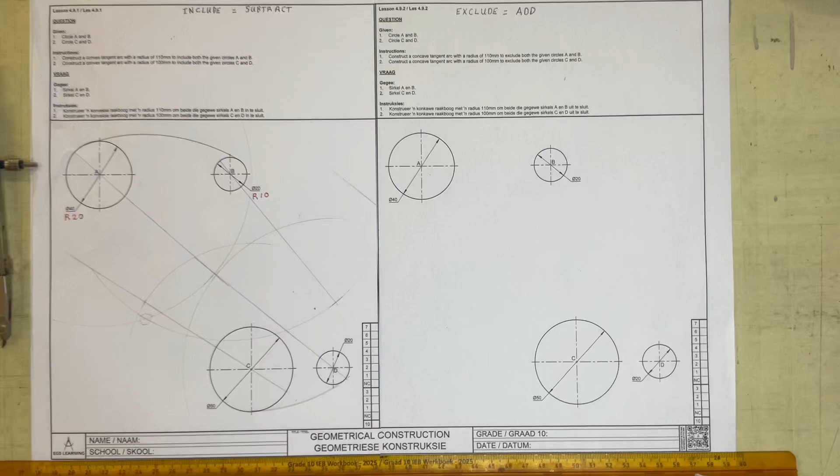All right, the second one, they're basically asking us to make an excluding circle. So we're going to have an arc which is going to look as though I'm giving it a backhand against there and a backhand against there. It says you're going to construct a concave tangent with a radius of 110 millimeters to exclude both of these circles, A and B.

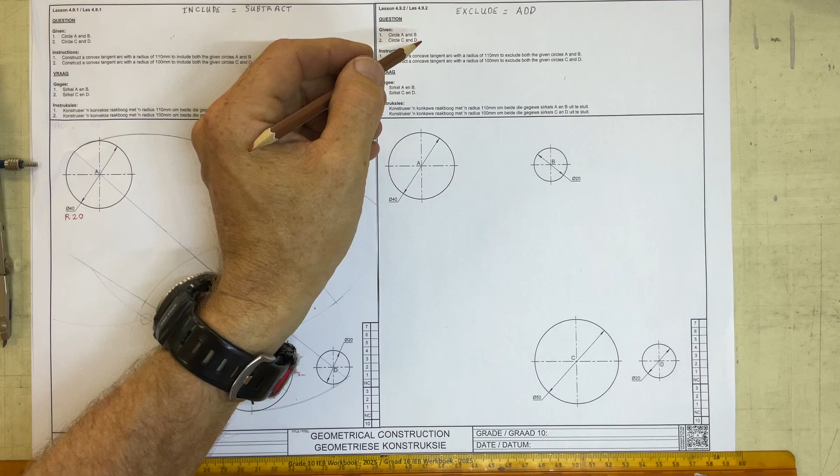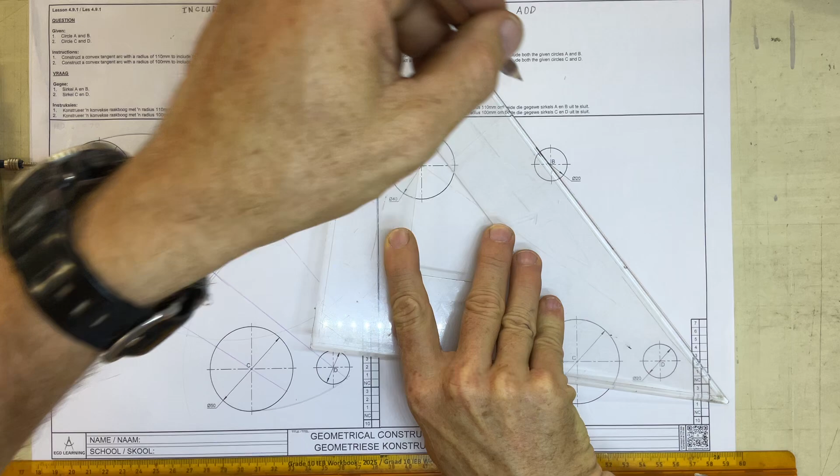So when we're excluding, we are going to add the two radii together. To do that, I'm going to start out and draw a little construction line coming out from A over there, and a construction line coming out from B over there. Hopefully I've made that long enough, because 110 is quite a long distance, so make sure you've drawn long enough construction lines.

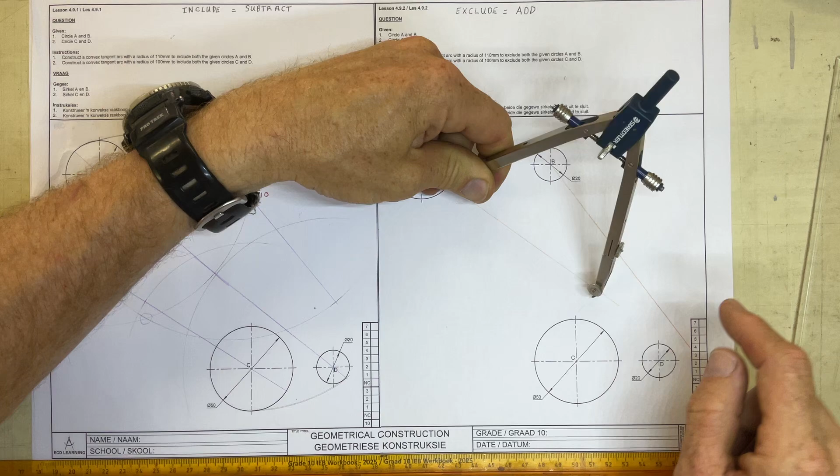I'm going to set my pair of compasses to 110 millimeters. There we go, 110 millimeters. If I just drew it from the center, that would be 110. But since I'm going to add on a radius, I'm going to add that radius to my 110. Make a little mark over there. So I've got the small radius over here, plus the big radius over there - small radius plus the 110.

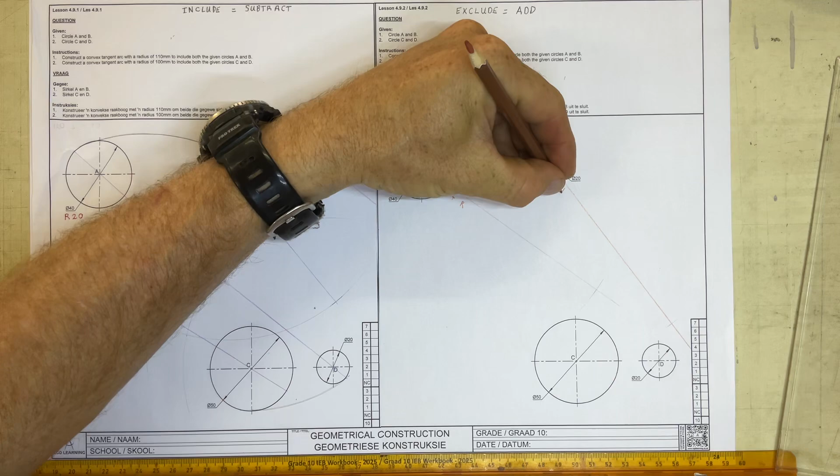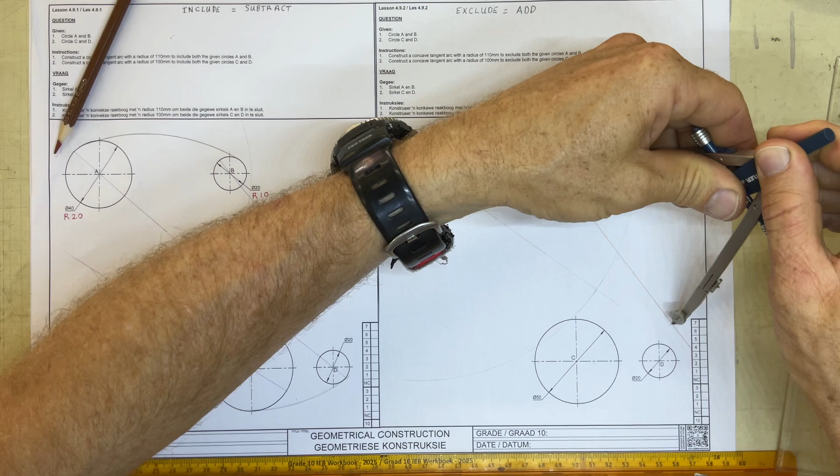Same story over here. There's the small radius going to the circumference. Mark that off, so I've got a small radius plus the big radius over there, and I've made that mark out there. Once I've done that, I'm going to take my pair of compasses, set them to that radius over there, and draw a nice long arc coming around like that. Then I come to B over here, wind it back to that radius, and draw a nice long arc coming around there.

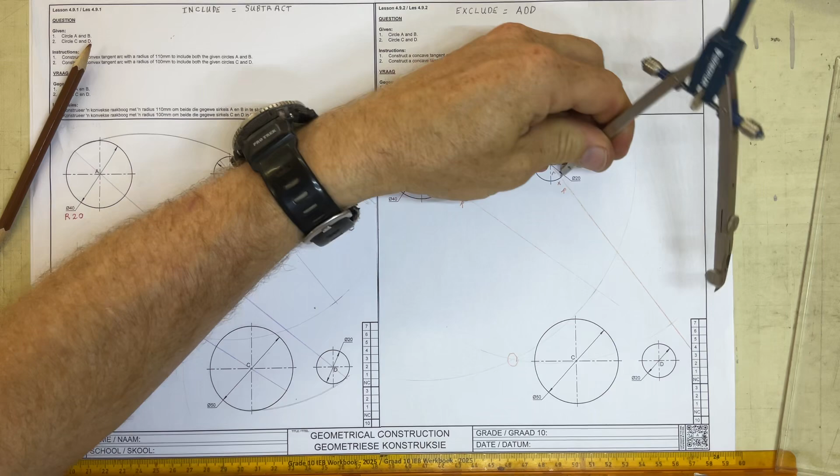I've got an intersection point over here, and now I'm going to set my pair of compasses to that 110. Note there's the 110 there. Check that, that's still the 110 there. If I put my pair of compasses in at that point over there, my 110 radius is going to draw an arc which excludes both of those circles over there.

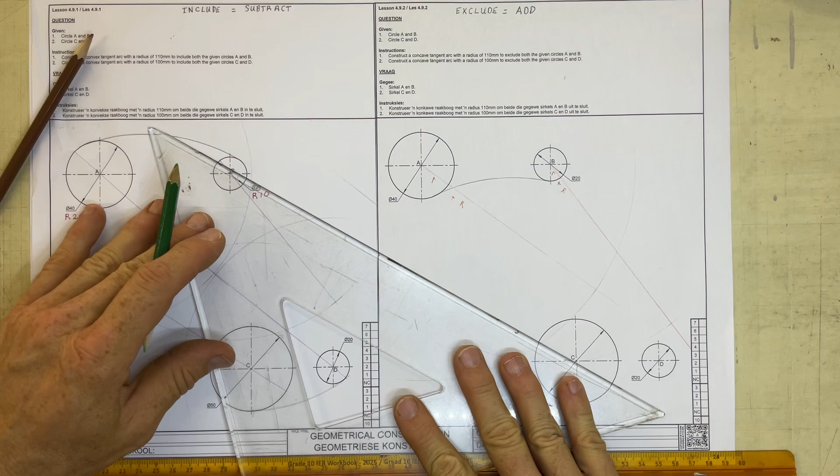Same story with this one. Let's just change the color over here so you don't get confused with any lines. I'm going to draw a line coming out from C, nice long line there, and a line coming out from D over there. And it says they're wanting a 100 millimeter radius.

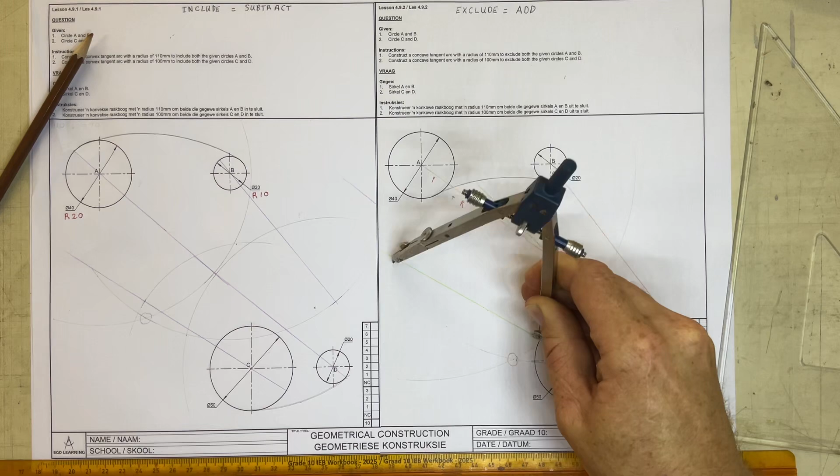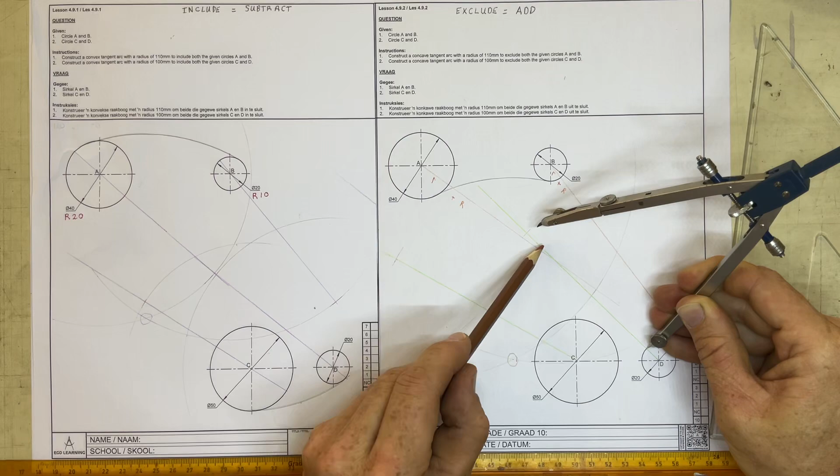I'm going to set my pair of compasses to 100. Go to C over there, move out to the circumference, mark it off over there. So I've got a 100 millimeter radius going out 100 millimeters from the circumference to that point, plus the radius. I'm going to do the same thing over here - there's my 100 millimeter radius on my pair of compasses. Move out to the circumference over there, mark off. So I've got small radius plus 100, small radius plus 100.

I now come into where C is. I extend my pair of compasses out to that radius over there, draw an arc coming round. Go to D over here, move them back to that point over there, and draw an arc coming around.

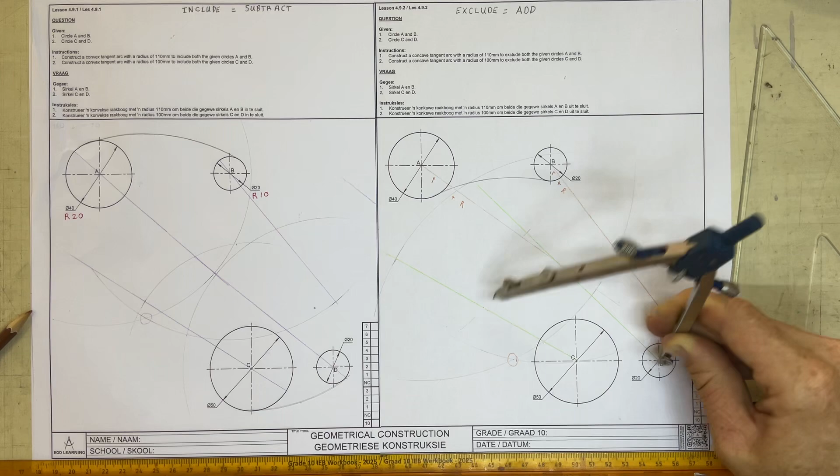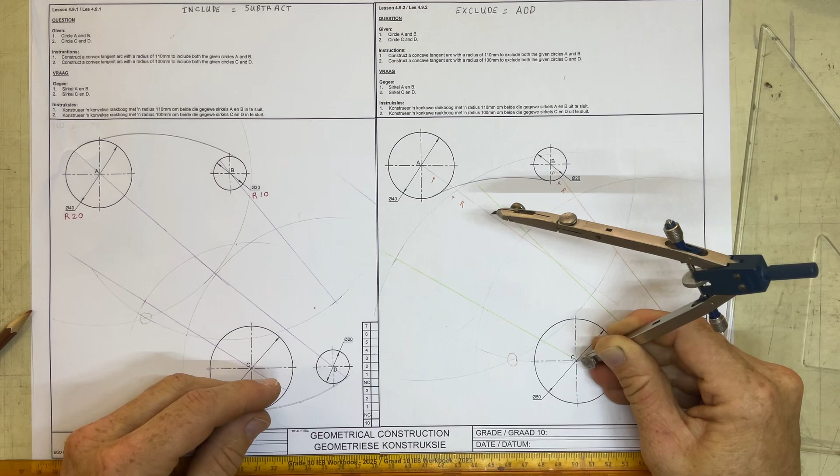Sorry, let's just see what I'm doing over here. That's not really working, is it? There it is. So I need to draw that out, and I need to take this, set that out there, arc that around, and there we go. There's my intersecting point. So don't be shy with these arcs that you're drawing - draw them all the way around, and there's my intersecting arc over there.

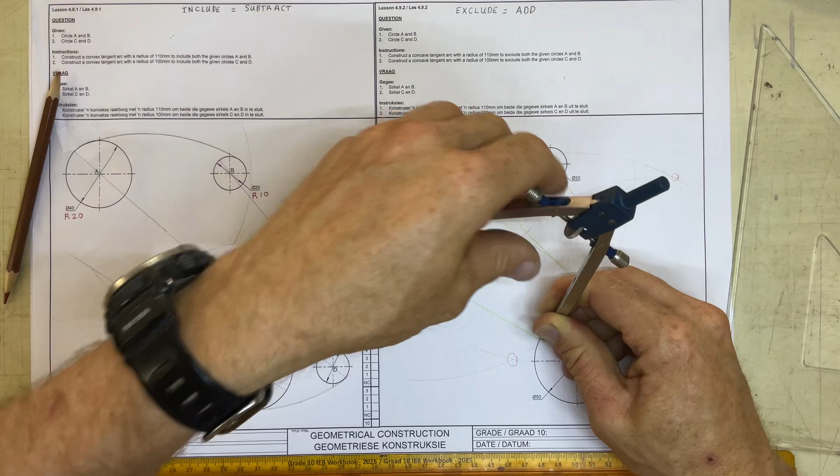Now what I can do is I can set my pair of compasses to that 100 millimeters. Note the 100 there, and the 100 there. If I take that over here to that intersection, you'll see that I've got an arc which is going to arc around, perfectly touching both those circles in there. There we go - there's the arc.